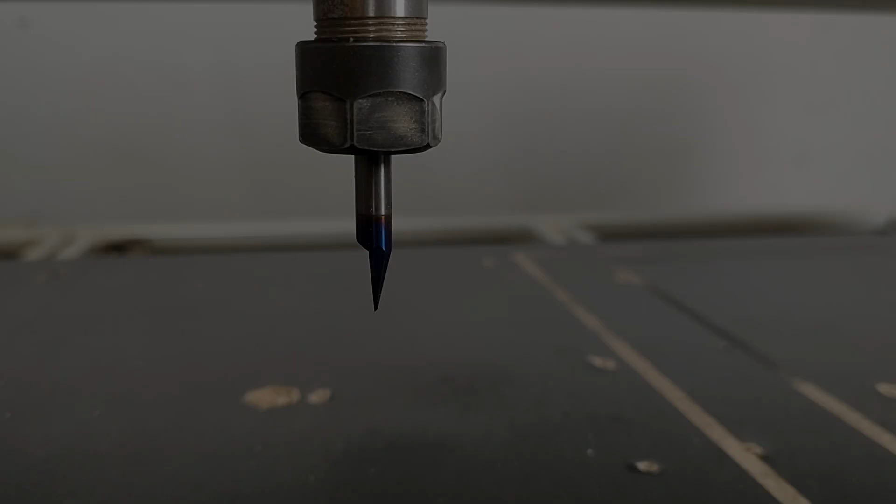Just as in any other CNC project, the toolbit is really important. I'm using a very high quality toolbit, and you will be able to see how great results I can achieve using this type of toolbit and this software that can V-carve, that can engrave almost any project you might think of.

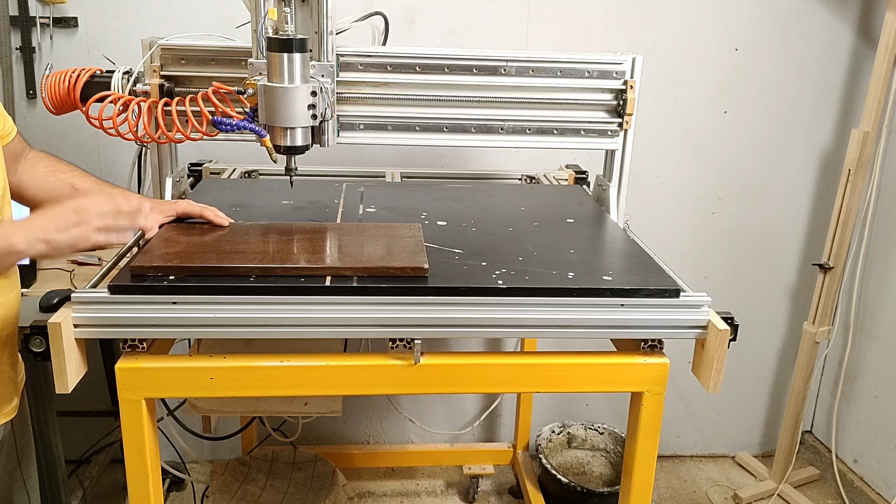A lot of you might have problems fitting the workpiece to the table if you don't have a vacuum table. I don't, obviously, and I want to show you the easiest method, especially when engraving things. Attach strips of double-sided tape to the table, and carefully align the piece of wood to the table, trying to keep it as perpendicular as possible to the axis of the CNC.

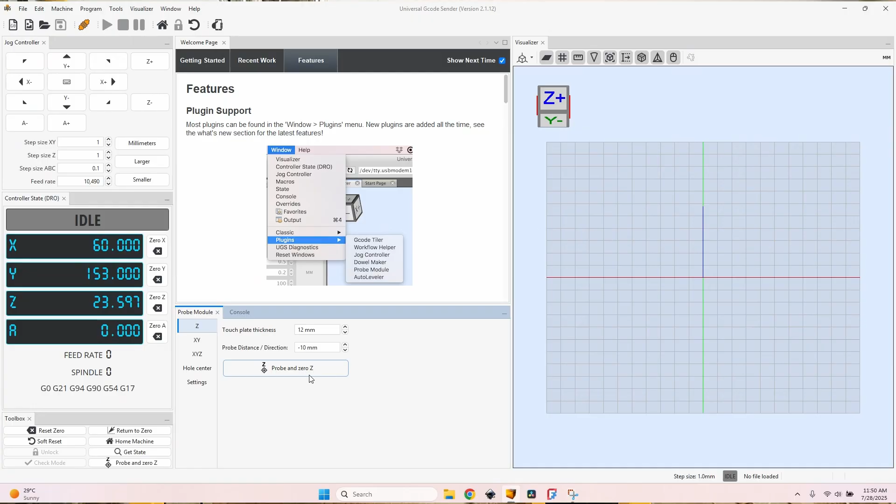Now let's set the Z0 to the top of the material, because that's the way I'm going to do things today. So place the probe on the table, attach the clip to the toolbit, go to the probe module and click on the Probe and zero Z button.

So the first part is ready. I'm going to stop the air blower and clean it a little bit so I can show you how it turned out after the first step, which didn't include removal of the material in the center of larger lines.

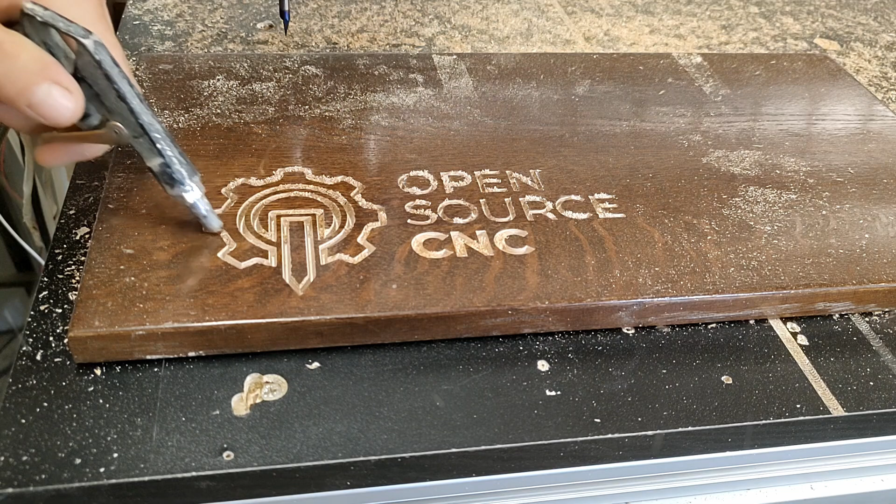I just wanted to show you that even though it might seem a very fuzzy cut, it's actually just sawdust trapped into the holes. That's because this is a toolbit with a small downcut angle, which means it will push the material to the bottom. This is great because it leaves these beautiful edges - it doesn't tear them apart when cutting.

In order to create that very nice toolpath that you have seen in action, I'm using Blender 4.5. You also need to install the FabEX CNC add-on, and here you have a video guide. You will see how to install everything in Blender 4.3, but the same applies for this version, so I'm not going to repeat that again.

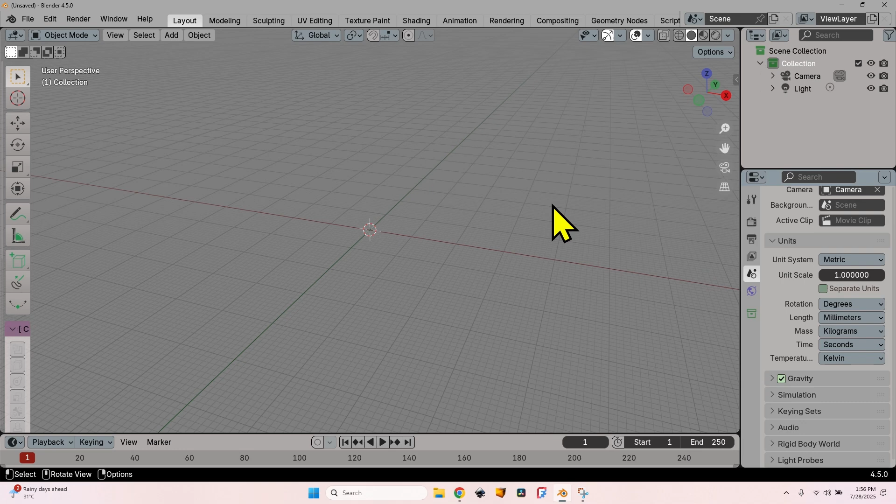Now let's import the logo and create the toolpath. Go to the File menu, Import, and select Scalable Vector Graphics. Go to the folder where I have the logo, select the file, click on Import SVG. It's just as easy as that. You can see it here. Everything looks almost exactly as I need it in order to create the CNC operations.

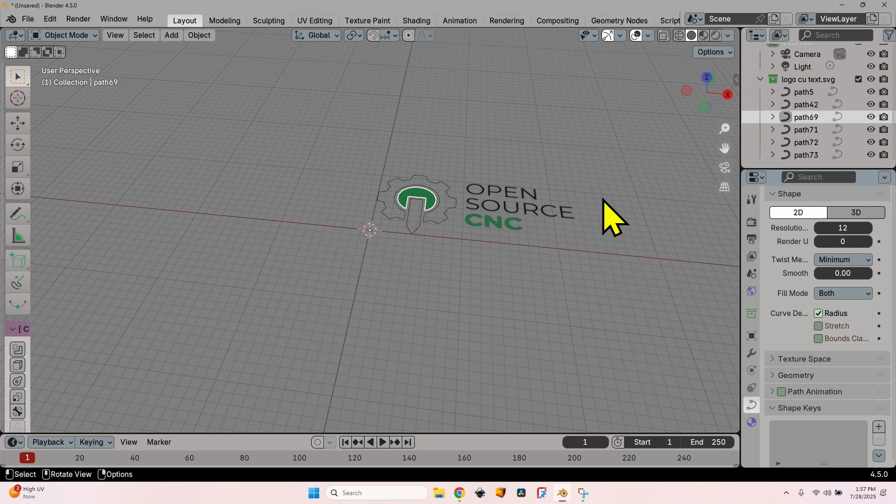If I take a look at the right in the tree, I can see that each of the objects in this SVG file is a separate path, which I don't want. It complicates things a little and will generate some problems, so let's make them only one object.

Click, hold the mouse button, drag to select everything, to touch everything. After selecting them, press Ctrl J to join all of them into just one curve. You can see it here, it's called path 5.

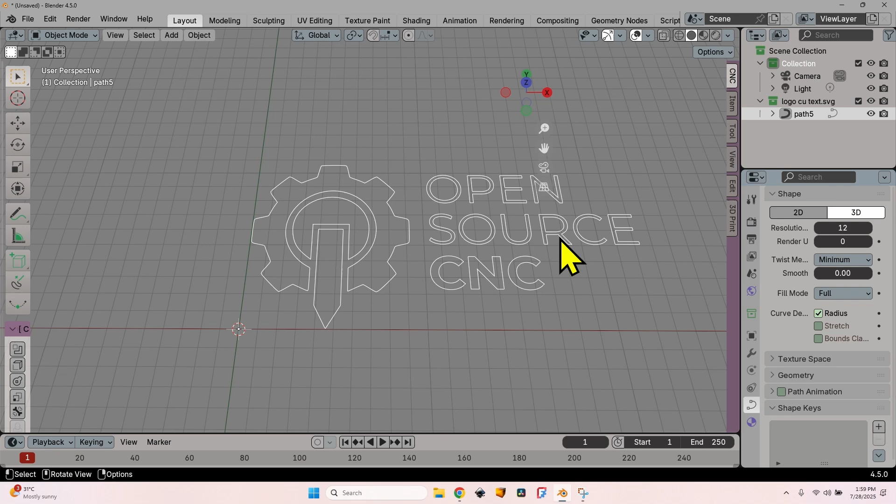Now that we have created a single object, let's resize it, let's bring it to the correct dimensions by pressing the N key or this little arrow here, which I cannot properly select with this mouse pointer. But let's press the N key and I have the menu open - well, I have just the side menu because the CNC doesn't have anything in it right now. Let's go to item because that's what we want. Let's check the dimensions, which is 223 millimeters by 105.

I want the logo to be 200 millimeters wide, so let's scale it. To scale it from 223 millimeters to 200 means a very specific number which I would have to calculate. Luckily, Blender helps me with that because I can simply write 200 divided by 223, press enter, and I have the correct scale on the x-axis.

Now let's copy the same value. You can see it has 6 decimals. Let's copy the same value on the y-axis. And now it looks again proportional, everything is correctly set up, the dimensions are correct.

I just need to do one more thing: take the mouse over the object, press Ctrl A to apply all the transforms, and now the scale is at 1 with the new dimensions.

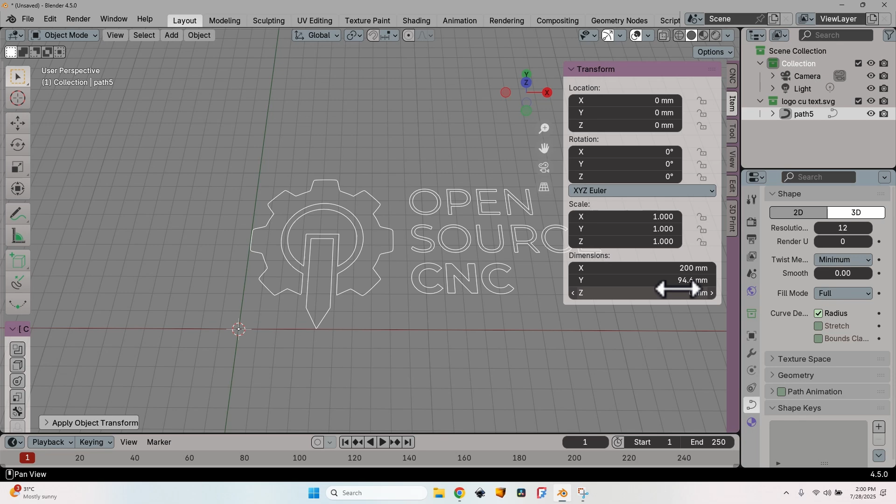Everything is set up now. Let's go to the CNC tab and see how to create the operations. Why is the CNC tab empty? Because I don't have the proper render engine selected. So let's go to render, scroll a little bit up and change the render engine from whatever it was by default to Fabex CNC/CAM.

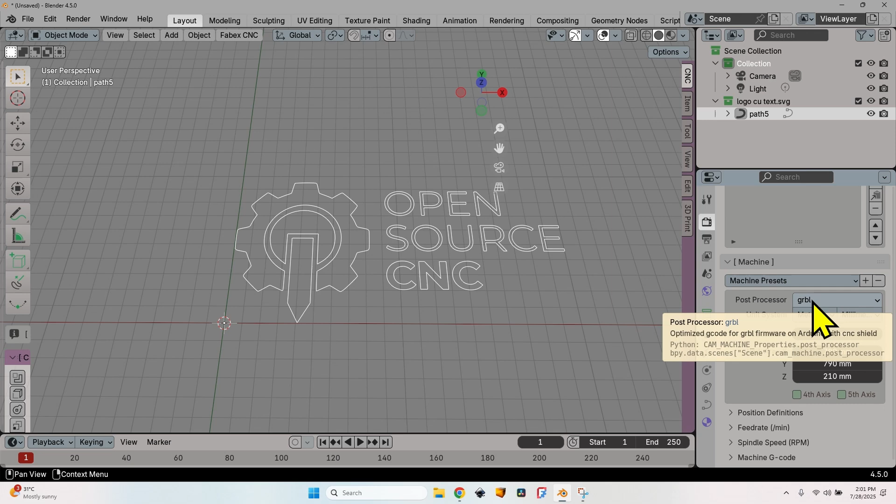Let's set up the machine first, scroll down to the machine group. Let's take them one by one really quickly. The post processor means the language that the G-code will be exported in. I'm using GRBL. If you're using a different machine, select the proper one.

The same applies for the unit system. I'm using metric. The next values, the collet size and the work area, depend on your machine, so set them up accordingly in order to avoid having some problems if the object is too large for your machine.

I still need to change a few things. Go to the feed rate group, open it and set a default feed rate, a minimum and a maximum feed rate. If you don't set the maximum feed rate according to your machine, let's say it is set to 2000 millimeters per minute, no matter how high you set that number in the operation, it will be limited to this value. So that is why it is really important to set the maximum feed rate that your machine is capable of.

The same applies to the spindle speed. You need to have a maximum which is valid for your machine, otherwise any value set higher than the maximum will be reduced to the maximum. And that's all we need to set up for the machine.

Now let's create the V-Carve operation. Make sure you select the object either in the tree or in the 3D view. Click on the plus button in the operations group. I have this part of the screen filled with all the information that I need to set up to generate the G-code.

First, let's change the strategy from profile to medial axis. This is how V-Carve is called in Blender. I will leave the add pocket option checked because for these areas the cutter head is too small. It won't be able to make just a V-Carve to generate this drawing, so I need to also remove some material left in the middle, and you will see in just a couple of seconds what I mean about this pocket. The safe height of 10 millimeters is okay.

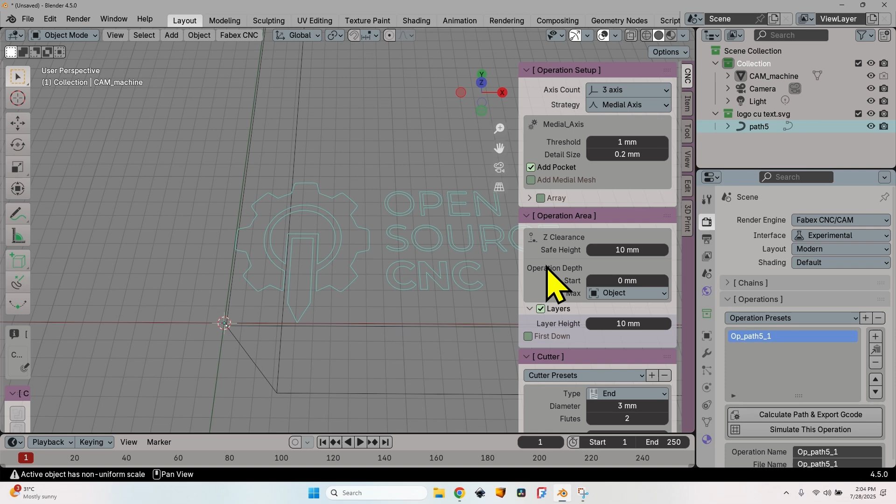If you're milling something very deep, I recommend using layers and setting a layer height according to the tool bit, otherwise you might end up with some problems, the cutter head not being able to cut everything. I will uncheck this because my object is 5 millimeters deep, so I don't need any layers.

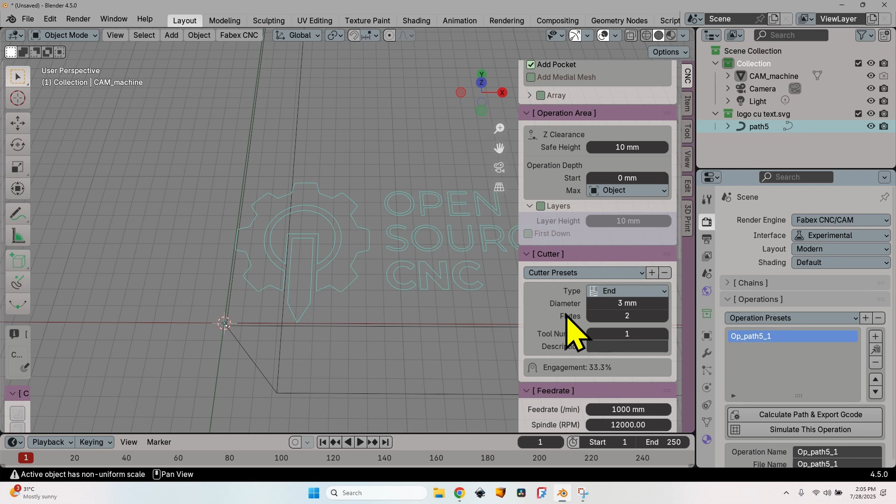Let's set the cutter. I won't select any preset, but I will set all the values manually. Let's change the type from end to V-Carve. I have an angle of 30 degrees for my V-bit and a diameter of 6.35 millimeters, a quarter of an inch. It has two flutes, but this doesn't really matter.

The tool number is valid only if you're using several tool bits, so I can leave everything exactly as is. For the feed rate, I will first go with the default of 1000 millimeters per minute, but I will change the spindle speed to 18,000 RPM to get a smoother finish.

There's just one more thing that I need to change in order to have a working file. Of course, we will modify it a little bit later to make everything run faster and better. But what is really important is to check the output trailer option and write M02 here. Why is it important? Because if you don't do that, the spindle won't stop at the end of the program. You need to stop it manually. It's pretty annoying, maybe you're doing something else. So remember to check the output trailer option and write M02 here.

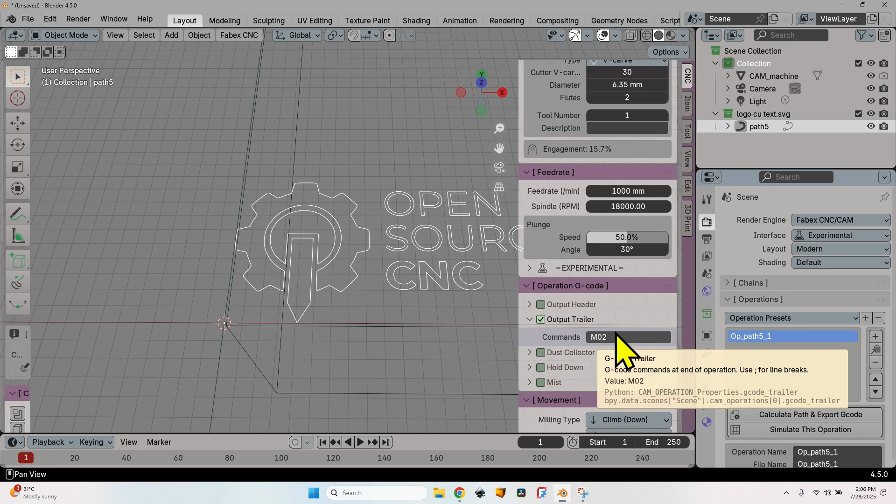Since this is a V-Carve, the climb or conventional milling type doesn't really matter because it will cut conventional on one side and climb cut on the other side of the tool bit. So no matter how I set it up, it just switches these two sides. This is all that I need to set up.

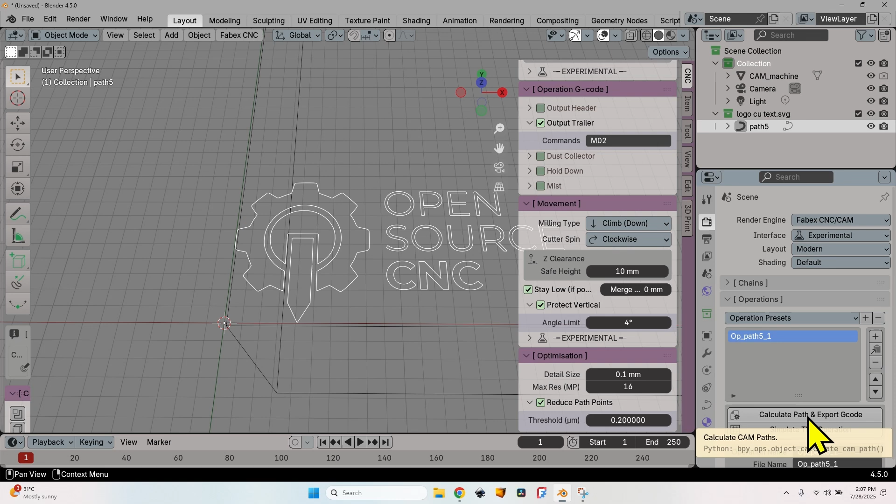I can now generate my first G-code for this logo. In order to do that, go back to the right and click on the Calculate Path and Export G-code button. Well, it's called wrong, it's not going to export the G-code, only calculate the path. You can see the G-code has been generated. Let's select it so it is highlighted.

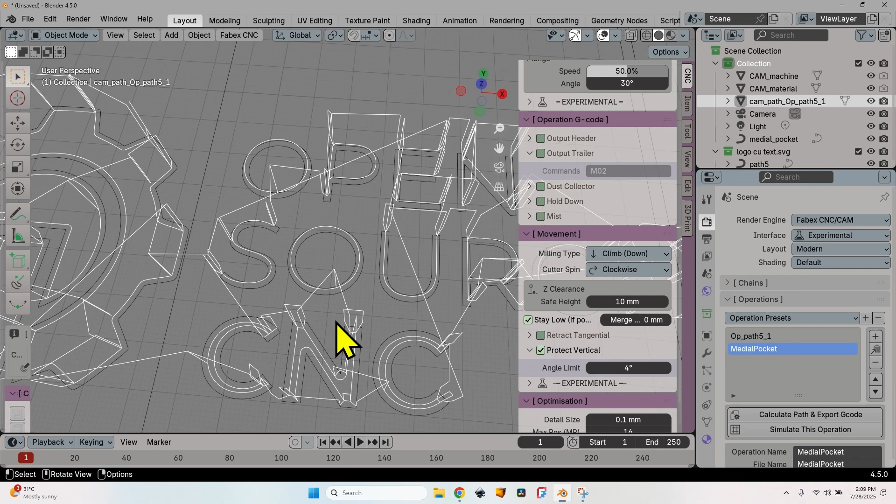It will mill the center of lines that are less wide than the tool bit. For lines wider than the tool bit, it will mill the outside edge, leaving material unmilled in the middle. It's more obvious on this part of the design where you can see it goes on the outer edge, but the material in the middle won't be milled.

Before showing you how to also remove that material, let's export the G-code. Then let's take a look at how things work out for removing this material. And in the end, I will explain how to set up the operation to get that result.

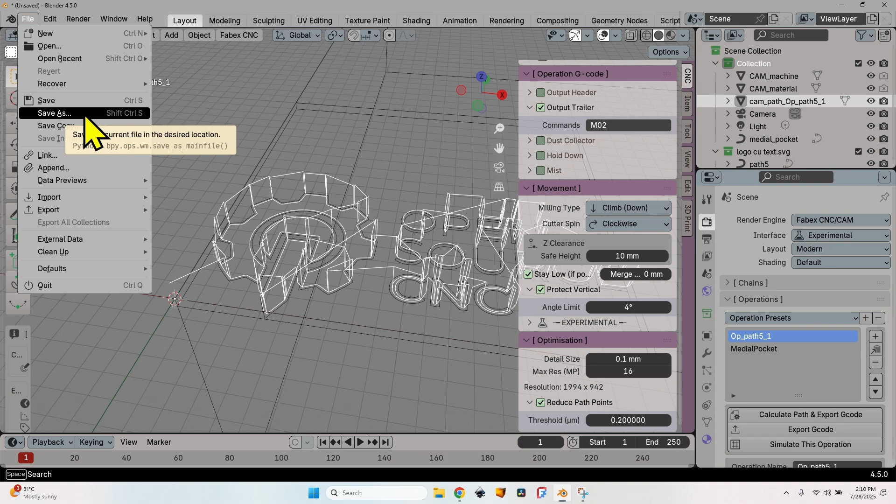In order to be able to export the G-code, I first need to save the file. If I don't save the file, everything will be saved in a certain location based on the Blender installation, but I don't like to look for files like that. Let's save the file and the G-code will be saved in the exact same location: log vcarve.blend. Now let's save the file.

Before doing that, I will go here and rename the operation and the file name. Let's call it V-Carve outline, and do the same for the file.

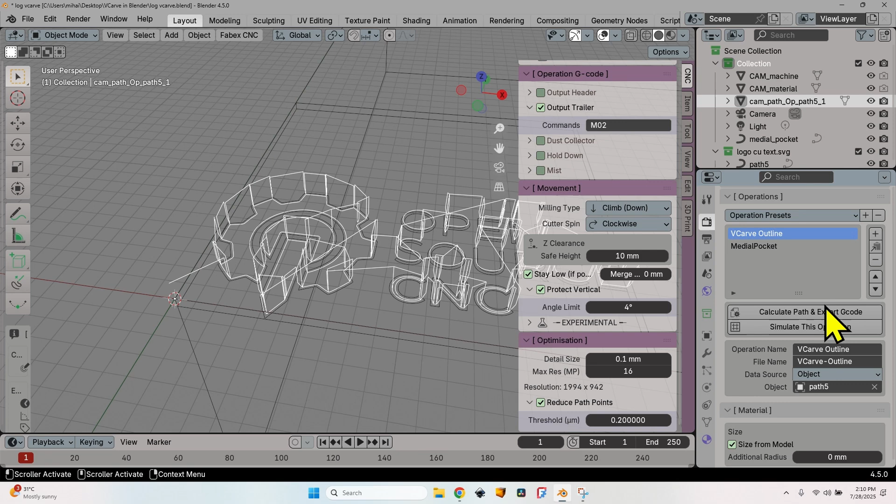Now I can click on the Calculate Path and Export G-code button again, which I remind you won't actually export the G-code. But after recomputing everything, I will have the button to export G-code instructions. Here is a button, click on it, and now the file has been created in the same folder where I saved the Blender file. I can now go to Universal G-code Sender and load it, and you have already seen how it works.

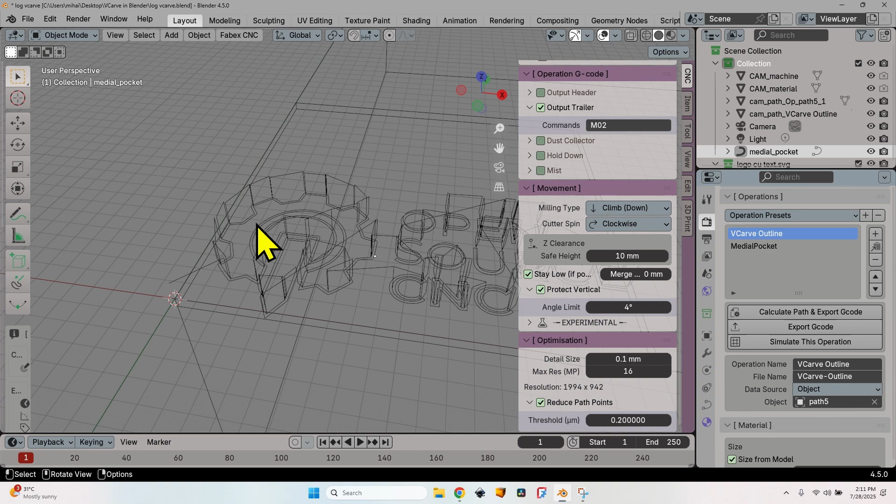Now let me show you how the Medial Pocket, the removal of the extra material, works, and then I will show you how to generate the G-code for that.

So we are back, you've seen it in action, there's a lot of movement, but it doesn't actually take that long. You could also switch to another tool bit, but this will result in other problems in the corners. Let me show you how to set the medial pocket so it works pretty fast and gives you great results.

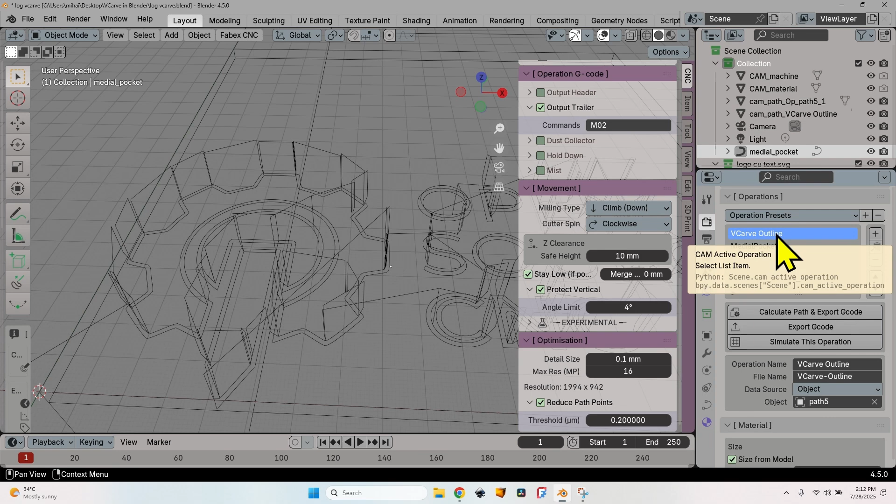When creating the V-Carve outline operation, it automatically created a new operation, medial pocket, and also, most importantly, a new object, the medial pocket. You cannot see it highlighted because it overlaps with the toolpath of the V-Carve.

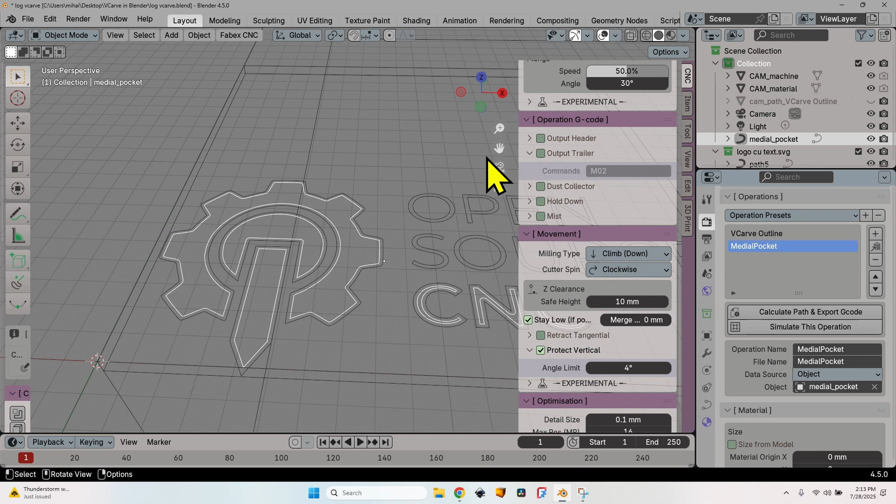Now you can see the medial pocket. It is a curve that represents all the material that couldn't be milled using the V-Carve operation. The medial pocket operation is based on this curve, which will remove the material from this area.

Let's set things up in order to get the results that you have just seen. Change the type from perimeter to parallel, change the angle to 90 degrees, and check the contour finish. Set a step over of 0.2 millimeters. For the operation area, I will leave everything just as is.

It has been automatically generated correctly. Let's go to the tool bit. Again, select V-Carve, and set a cutter angle of 30 degrees. In my situation—if you're using a different tool bit, of course use a different angle.

And here is the little trick that I'm using: I'm not going to set the diameter of 6.35 millimeters. Instead, I'm going to use the diameter of the tip of the tool bit, which is 0.2 millimeters.

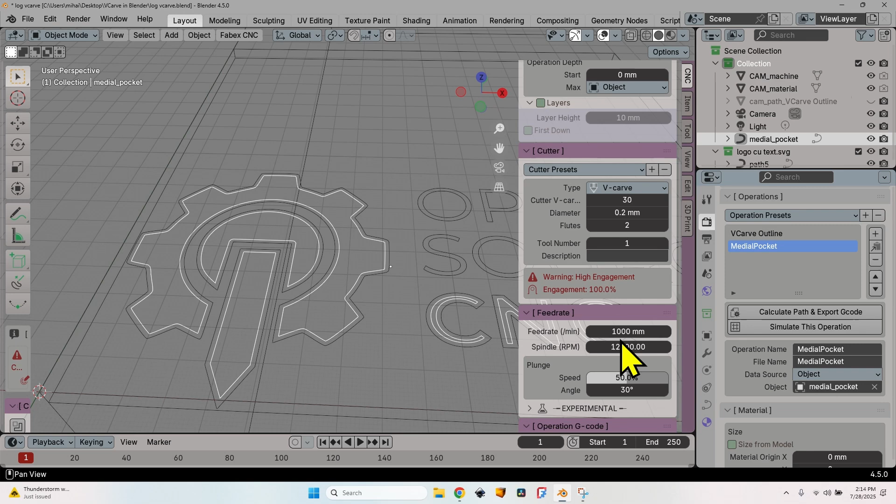Now scroll to the spindle speed. Let's set a spindle speed of 18,000 RPM. Leave the feed rate just as is for now. Check the output trailer again—I remind you this is really important so the machine stops when the operation is finished.

One more important thing is the milling type. Change it from climb or conventional, or whatever it is, to meander, which will reduce the time in half. It won't cut from left to right, then lift the tool bit and go back to the left, and so on—it will cut in both directions. When moving left and then when moving right, it will cut. This means the overall time will be reduced in half.

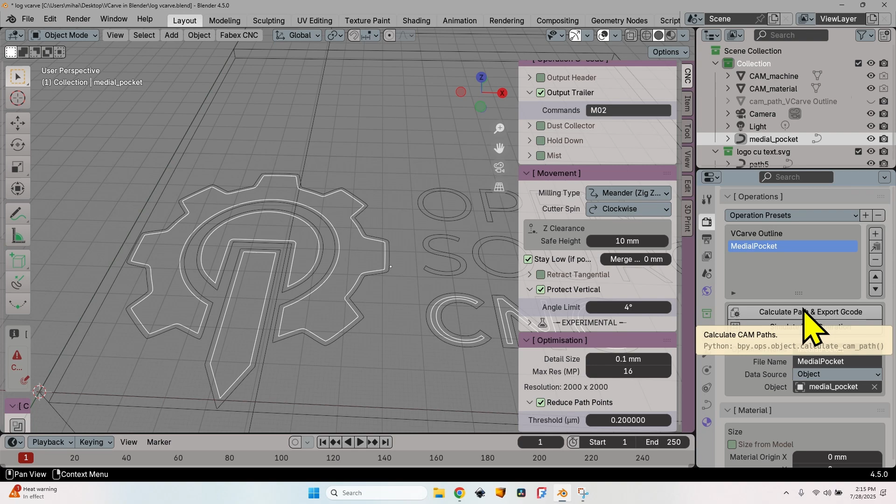That's all I need to set up here. I can again click the calculate path for this operation. And you can see it highlighted all those small lines one next to the other, which leave that perfect finish for the bottom of the pocket.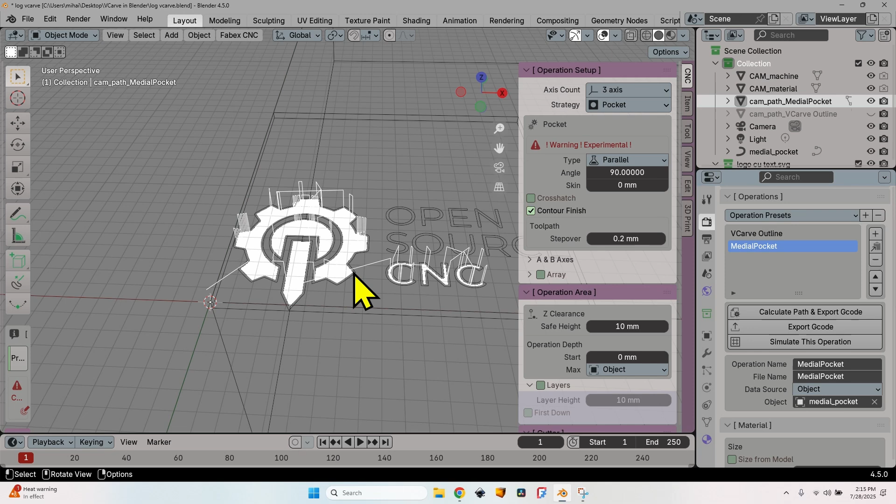I have to admit that I've never achieved such a beautiful V-Carve until I discovered Blender, the Fabex CNC add-on, and of course this great toolbit that works absolutely amazing. I will expand this panel a little bit so I can show you how to optimize things both for the V-Carve outline and for the medial pocket operations.

You have seen the optimized version, and let me show you each of the settings that I have changed, explain why I did that, and let's see how much they affect the total time. You can see here on the left, let me scroll a little bit, the estimated time of the operation. So let's take them one by one. The V-Carve outline takes 12 minutes and 57 seconds, and the medial pocket 22 minutes and 42 seconds.

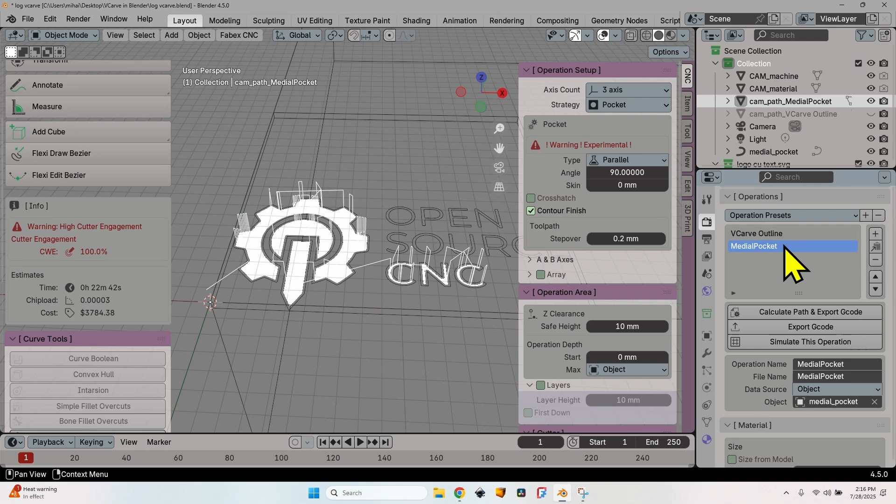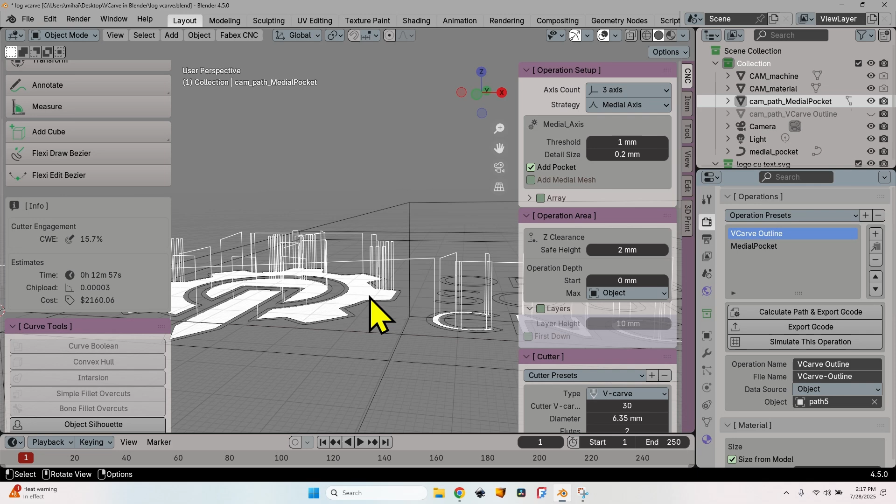Let's improve this first for the V-Carve outline. If I take a closer look, I can see that I have a lot of going up and down of the tool bit. Since my piece is attached to the table using double-sided tape, let's change that to 2 millimeters because it is high enough in order to avoid touching the material, but also to avoid a lot of useless travel up and down. Let's calculate the path again and see what difference is from the 12 minutes and 57 seconds estimated for the initial setup.

All of a sudden, by just changing the safe height, the time has dramatically decreased to less than half, 5 minutes 59 seconds. Let's take it even further and modify some other things. Here I have the feed rate, which is the default 1000 millimeters per minute. If your machine can handle more, try to use a higher feed rate because it will also reduce the milling time. In my situation, I'm going to use 2000 millimeters per minute.

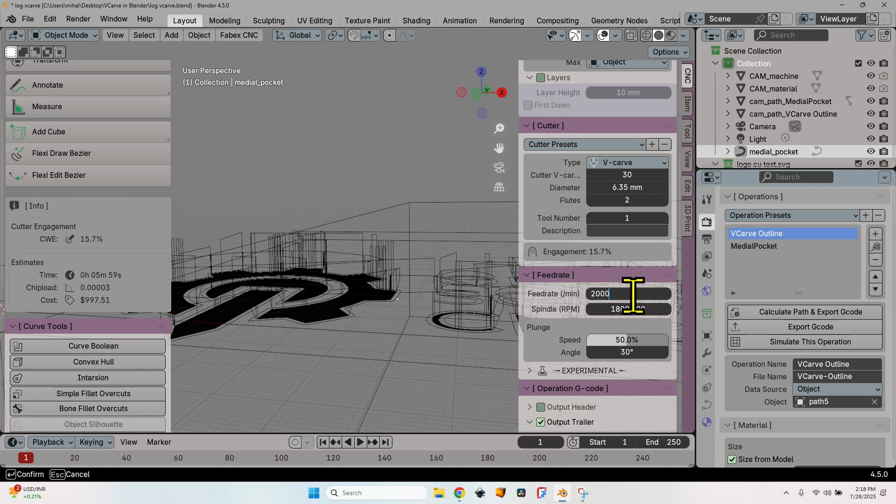The machine can do more, but I think it will affect the finish, so 2000 is the limit in my situation with this tool bit in this type of material on this machine. Let's calculate it again and see how much time we are going to save using this feed rate improvement. So from 5 minutes 59 seconds, now it's 3 minutes and 5 seconds.

Again, a huge improvement, but there is still one thing that I can improve in order to save some extra time, which is the plunge speed. By default, it is 50%, which means the speed on the Z-axis is going to be 50% of the feed rate, 1000 millimeters per minute. I can, without any worries, increase this to 100%, so it moves also with 2000 millimeters per minute. Now let's recalculate it and you will see why everything worked so fast in the first part of the video where you've seen this operation in action.

So another minute saved. Now the total time of this operation is 2 minutes and 3 seconds. In the beginning, with the default settings, it estimated a time of 12 minutes and 57 seconds. I've been able to reduce it to just 2 minutes and 3 seconds by changing a couple of settings.

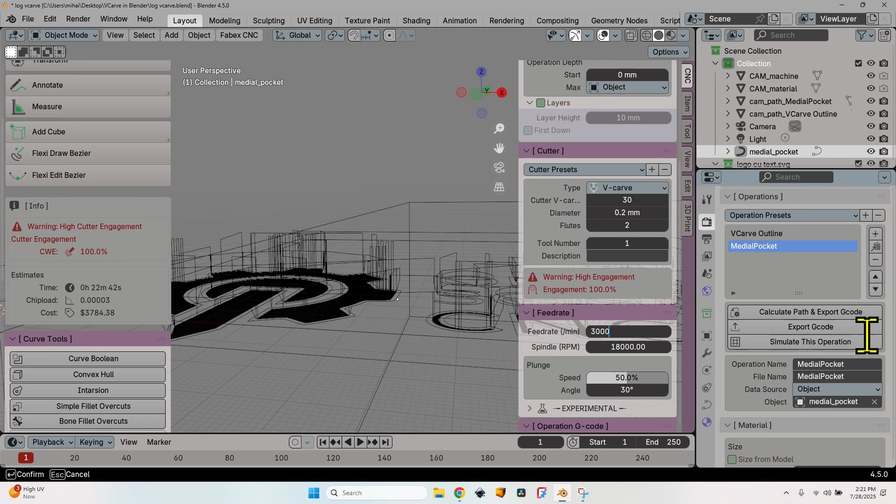Now let's move to the Medial Pocket operation to modify the same settings. So the safe height, let's bring it to 2 millimeters. Scroll down, change the feed rate to 3000 millimeters per minute. This time I can use a higher value because it won't mill any edges which I need to look perfect. It will just remove the material in the center, so I can use an even higher rate than for the V-Carve. Let's also change the plunge speed to 100% and let's take a look. For now it estimates 22 minutes and 42 seconds. Let's recalculate the operation and see how much time we are going to save by modifying these settings.

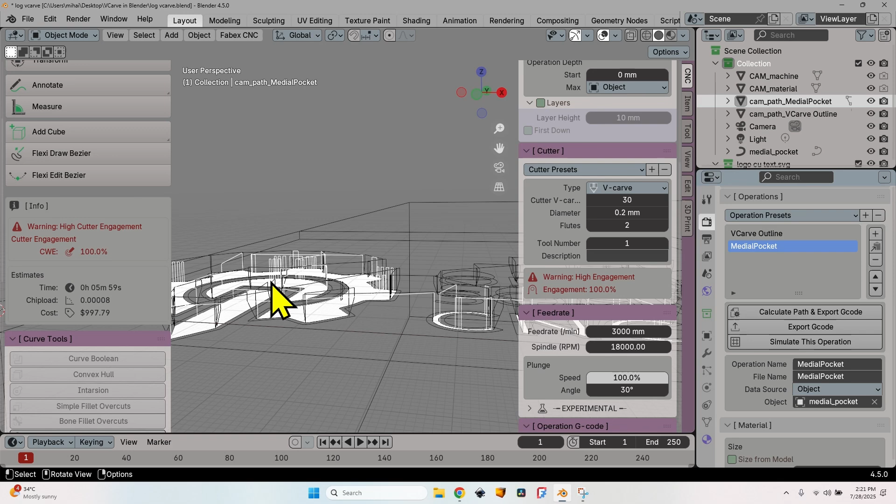The total time now is 5 minutes 59 seconds. Together with the 2 minutes and 3 seconds in the first operation, the entire V-Carve will only take me 8 minutes for a 20 centimeters by 10 centimeters logo V-Carve. This is why I love Blender and I love using Fabex CNC for any V-Carve operation. It is really powerful. It can handle objects that are wider than the tool bit. It handles pretty well combined SVGs. It does it fast. It does it with a really good quality of the toolpath. And if you combine that with a really good tool bit as I used in this video, you will get incredible results without any need for further finishing.